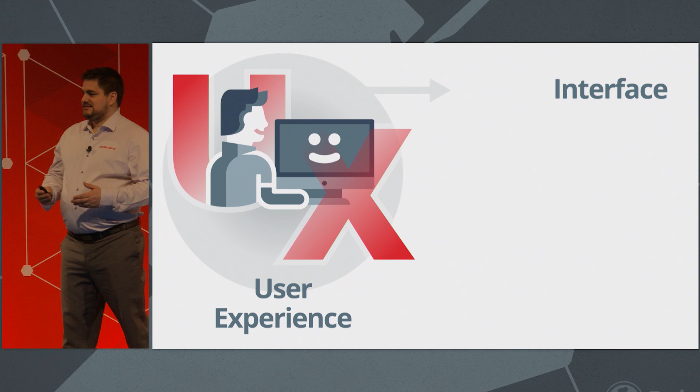This year, we targeted 3 main aspects to improve the user experience. First, we've worked on the user interface, the toolbars, the menus, the objects, the colors. This is how you interact with the software to get work done. Then, we've improved the ease of use of the software. We know we have the tools, we just need to make sure you can find them and use them properly.

Finally, to top this off, we've improved the performance of our software to save you precious time. Our end goal, whether you are a new user or an expert user, is to improve your productivity. Let's start with a quick preview of some of the changes we've done this year in terms of user experience.

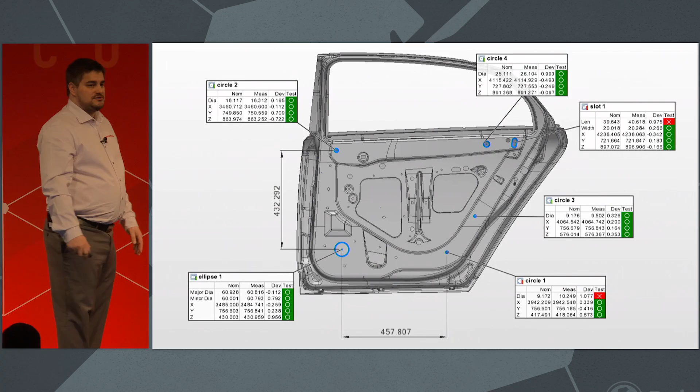This is the PolyWorks 2017 interface that you're already accustomed to. But now, let's take a look at the brand new and enhanced PolyWorks 2018. The first thing you'll probably notice is a completely revamped color scheme. We've also simplified the icons for clarity and to give PolyWorks a more modern look. The simple thought of new icons might intimidate some of you, but look at them. You can probably recognize all of them.

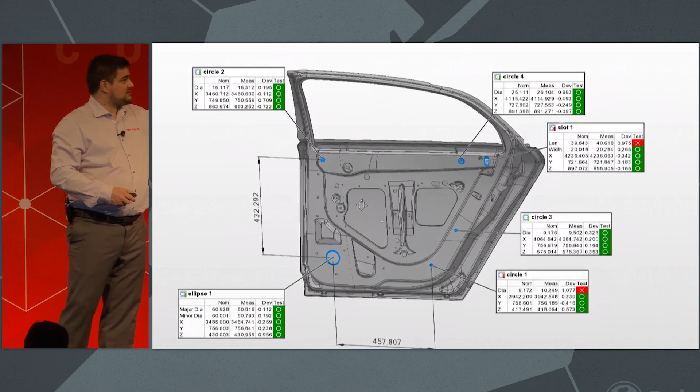Interactions within the 3D scenes have also been enhanced by offering you tools easily accessible when you need it. You'll be also happy to see that the annotations are now locked in 3D, meaning that you won't lose them when moving the model around. This was just a quick preview. Let's now explore in more detail how the user experience has been improved.

When you'll first install PolyWorks 2018, the first thing you will probably notice are the new icons for our main products. Here's the new icon for PolyWorks, PolyWorks Inspector, PolyWorks Modeler, and finally, PolyWorks Reviewer, which was formerly known as PolyWorks Viewer. Not only did we revamp the icons of our main products, we went all in and reviewed all the icons of the software.

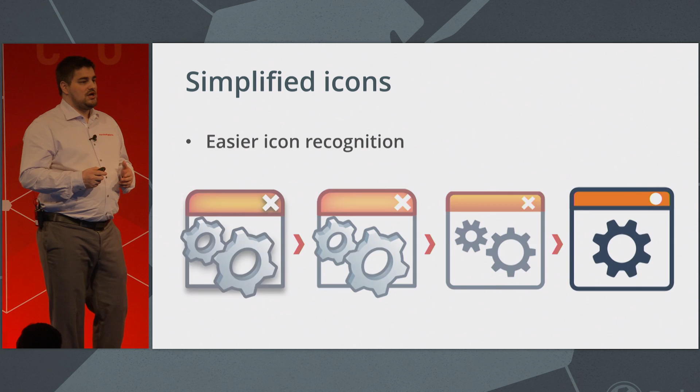The main objective behind this was to improve the icon recognition. We started by removing the gradient, the shadows, the 3D effect, and then we removed as much detail as possible to keep the icon simple. We wanted to improve the icon recognition, but at the same time, we wanted to ensure a smooth transition to the new version. So we kept the original concept behind each icon. Finally, we wanted to pave the way for future products. These more modern icons will fit better in various other environments.

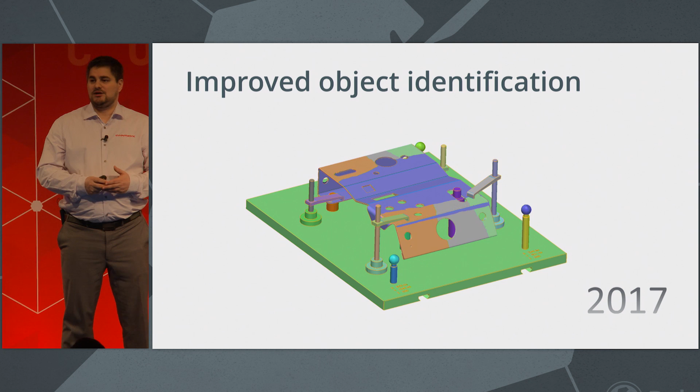For reference and data objects, we decided to use two distinct color palettes. For reference objects, we will use a gray palette, while we will keep a colored palette for data objects. This will allow you to know at a glance whether you're looking at CAD or data. You can also see that all the curves on the CAD models, whatever their types, now have the same color by default.

Similarly, measurement objects such as features and comparison points now have the same color by default. You can still change the color of any of those objects. We simply changed the default color.

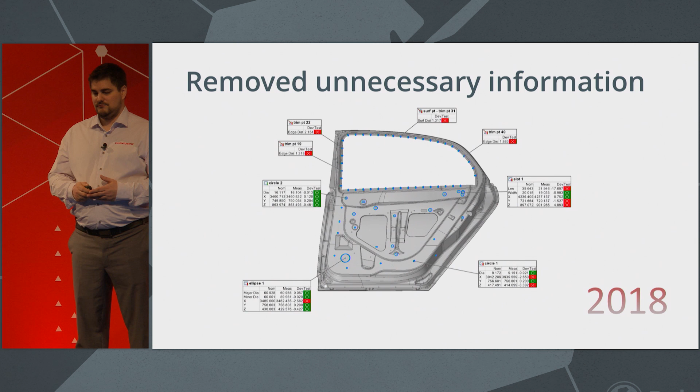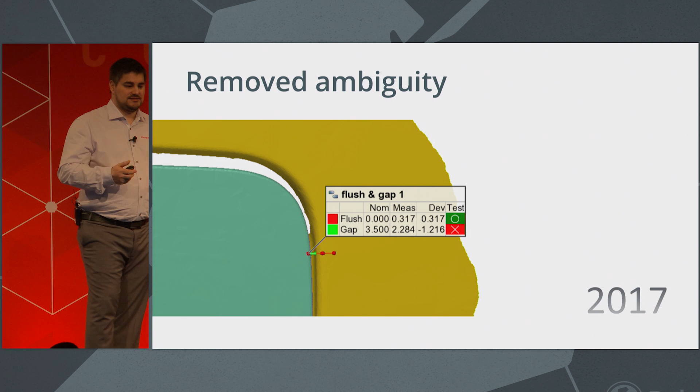In the past, we sometimes used bright red, green, and yellow for other purposes than to identify pass and fail status. For example, with the flush and gap gauge, the flush was always drawn in red and the gap in green, independently from their pass and fail status. And this could cause some confusion. So now, we're only using those colors to identify pass, fail, and warning statuses.

PolyWorks is a large, well-organized toolbox. But there are lots of tools and options, and we know that this can be overwhelming, especially for new users. So we're working hard on making these tools easy to use to speed up your learning curve and increase your productivity. To create snapshots or control views, you often need to move the annotations in the 3D scene.

And you want to also change the display options. To simplify this process, especially for new users, we wanted you to be able to find those tools and options on your own. We also wanted those tools to be only visible when you need it. To do so, we added a mini toolbar that pops above each annotation to allow you to do what you need with those annotations.

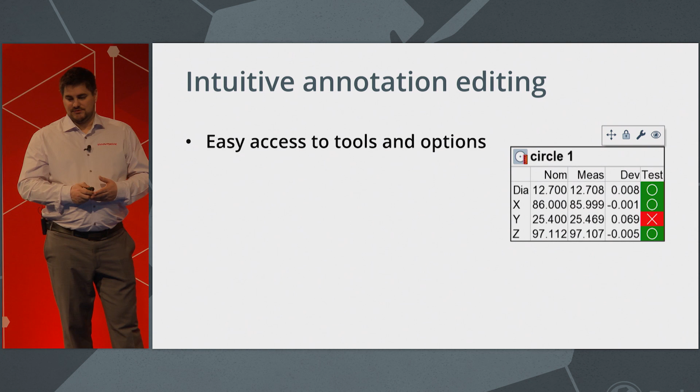Also, if you spend time manually positioning all those annotations, you probably don't want them to move from their new position. Therefore, we added a new mechanism that locks the position of those annotations in 3D so that they will move with the model. Let's take a look at a video that demonstrates those new functionalities.

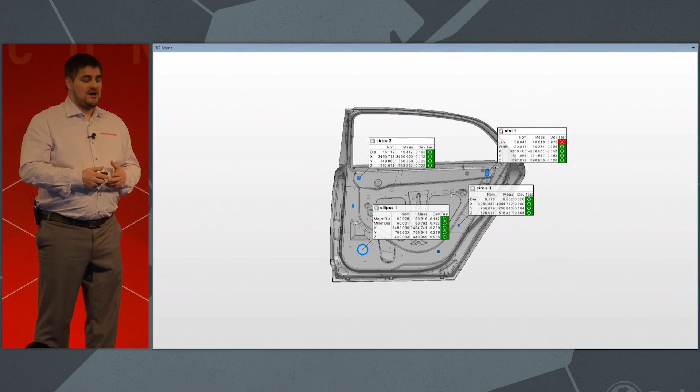In PolyWorks 2018, we're introducing new ways to interact with annotations. You can now simply put your mouse cursor above an annotation to access this mini toolbar. The move tool allows you to drag the position of the annotations. You will also notice that if you put your mouse cursor above an object, this will show the annotation if it was hidden.

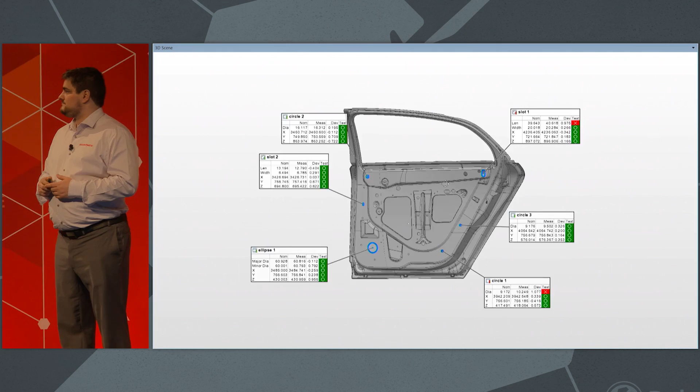As I mentioned, once we move those annotations, they're now locked in 3D, so you can move the model around and you won't lose all those positions. If you want to go back to the automatic positioning, you can unlock the annotation position. You can also easily edit the annotation content from this mini toolbar.

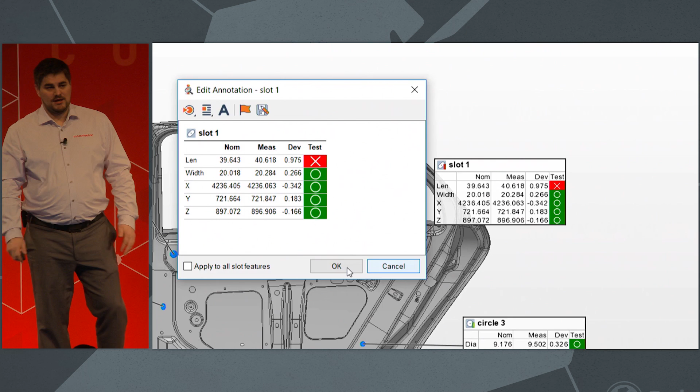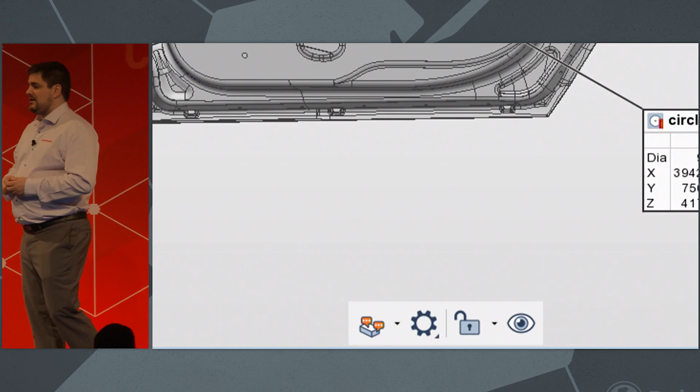Finally, you can easily hide an annotation and restore it. All these actions were only affecting a single annotation at a time. But now when you move annotations, you also have access to a global toolbar at the bottom of the 3D scene. This allows you to change the positioning mode or the display options of all those annotations, or lock, unlock, hide, and restore all the annotations at once.

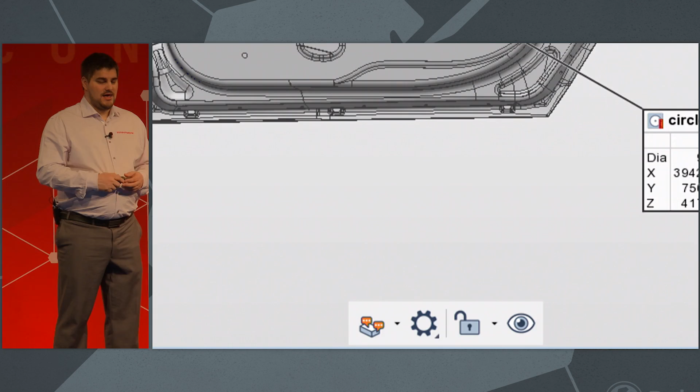Managing annotations is now easier than ever by having all these tools and options directly available in the 3D scene. Most of you know that PolyWorks has two main products: PolyWorks Inspector and PolyWorks Modeler. Some of you may only use one of these products, but certain data processing workflows need both PolyWorks Inspector and PolyWorks Modeler. They both have great tools that are complementary to each other.

Inspector is where you will scan, probe, and use different measurement tools such as features and color maps. On the other hand, Modeler specializes in the editing of polygonal models and the reverse engineering of 3D models. When you need to use both, you often need to transfer objects from one product to the other. To simplify this process, we now create a link between a Modeler and an Inspector project so that you can easily transfer objects with one click without the need for browsing.

Let's take a look at a typical reverse engineering workflow to show you how you can use this tool. A typical process starts in PolyWorks Inspector. This is where you will scan, probe, and maybe extract some features from the mesh. At one point, you're ready to transfer the scan data to PolyWorks Modeler. In PolyWorks 2018, this is easily done with a single click. This will create a new Modeler project, import the object, and link the two projects together.

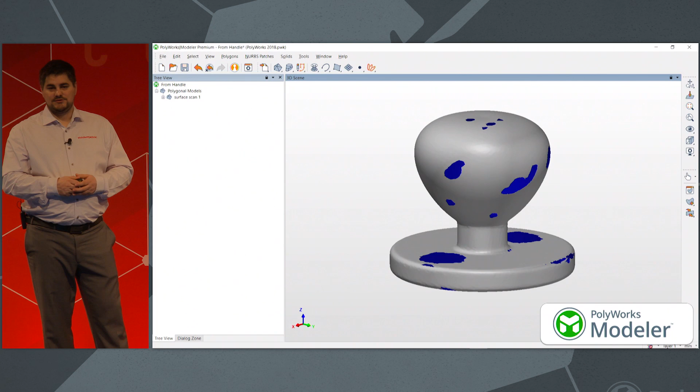Now in Modeler, you can continue the reverse engineering process. You can remove some features, fill the holes, create some curves, get NURBS patches, and eventually you'll get a NURBS model. In this example, we have the global shape of the object, but we're missing the two holes at the bottom.

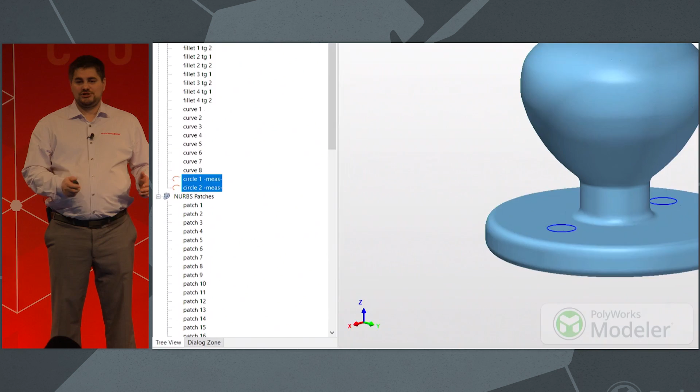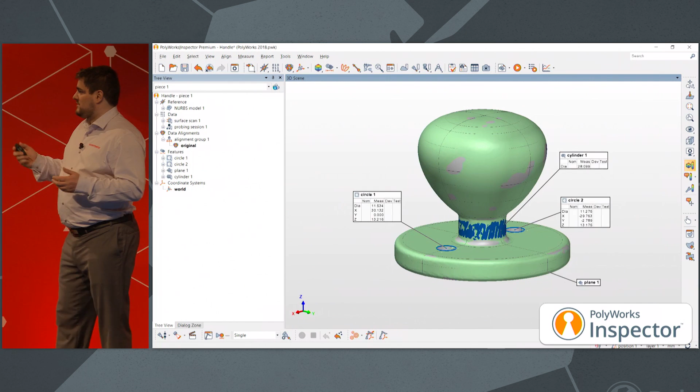To get those, we can go back to our Inspector project, select the two probe circles, and just transfer them to Modeler. Thanks to that link, we know in which project to send those circles. So now in Modeler, you can easily punch those two holes, and you'll have a complete 3D model. This process can go both ways. It can also go from Modeler, so you can take that NURBS model, bring it back to the original Inspector project to do, for example, a color map between the final 3D model and the raw, unedited scan data.

Performance. One of our ongoing objectives is to allow you to work as efficiently as possible. To do so, one approach is to identify key long operations and to shorten them by optimizing their algorithms. This year, our main focus was on improving the import of CAD models. When we import CAD models, we do a lot of processing.

For the IGES and STEP formats, this process was already multi-threaded, but for other CAD formats, a lot of the processing was still done using a single CPU. In PolyWorks 2018, we're now reusing the same technology as the IGES and STEP formats to fully benefit from all the available CPUs. This will cut down on the import time by a huge factor.

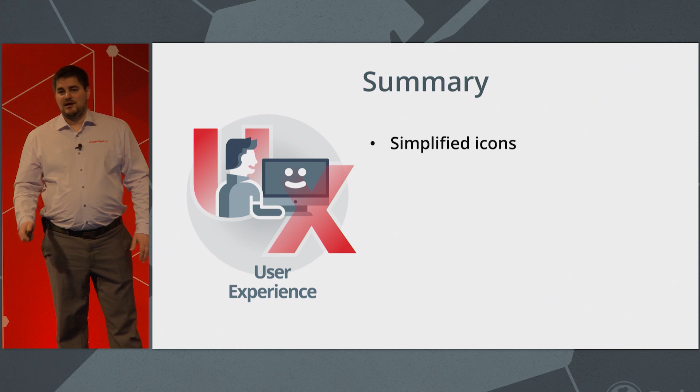Basically, the bigger the model, the greater the gain. To summarize, icons have been simplified to make them easier to identify. Colors have been adjusted for clarity and to remove ambiguity. Annotations are now easily managed directly from the 3D scene.

Transferring objects can now be done with a single click between products, and the import of CAD models is faster than before. All of these improvements will improve your day-to-day productivity when using PolyWorks.

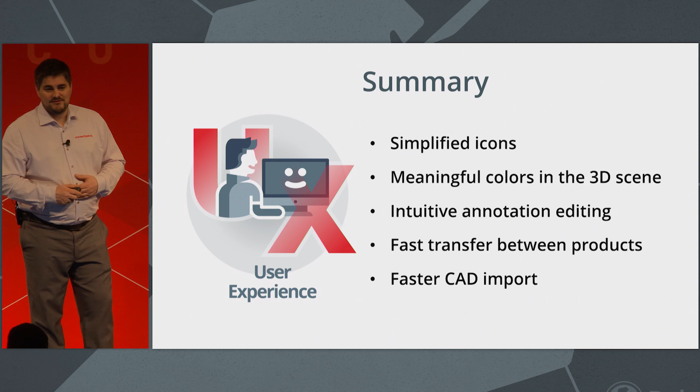This concludes my part. Thank you very much. I will now invite Éric back on stage to continue this presentation. Good job. Thanks, Richard.

So we've gone through the enhancements made to the user experience. Let's move now to the second part of today's presentation, universal projects. What is a universal project? It is a project that can be used on any of your devices. This ambitious development project started 6 years ago.

In 2012, we developed the multi-piece architecture. Projects could now contain multiple pieces in a single project. In the next 4 years, we developed the support of the CNC CMMs, a fundamental building block for the universality.

In 2016, we developed our conversion tools, so you can easily take an existing project and reuse it on a different device using those conversion tools. The same year we developed the offline simulation mode. Offline simulation mode is a key technology to create inspection projects.

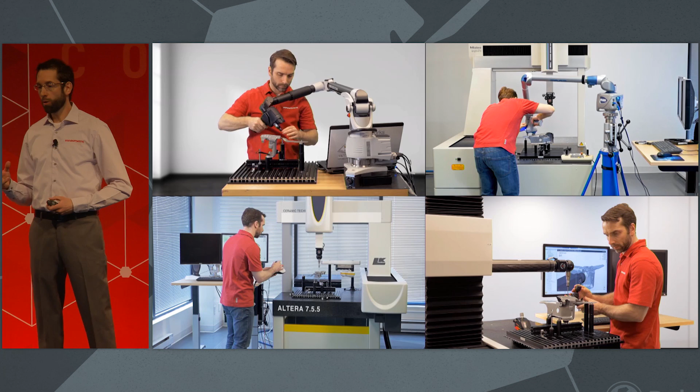Now, this year, we are introducing the new piece template technology, the final milestone in delivering you truly universal inspection projects. So with PolyWorks 2018 and the new piece template technology, you will be able to use your project on a variety of devices.

When measuring a new piece, the operator will be able to choose which piece template to use according to the available device. Switching from a CNC CMM to a portable arm has never been this easy. It's one click to choose the template.

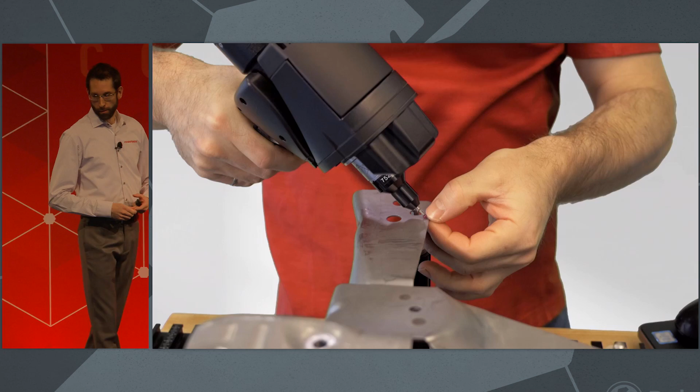There are many advantages of using different devices when measuring pieces. You will see in this demonstration that with the new piece template technology, it's not only a great advantage when changing devices, but it also offers the possibility to use different measurement plans, different measurement methods, different CAD models. So simply said, we are offering you shop floor ready universal projects.

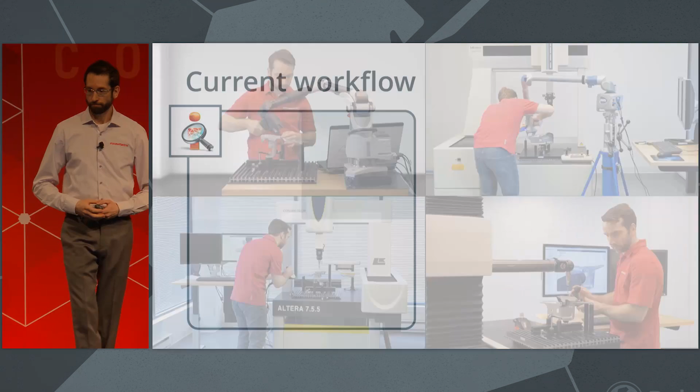So before discussing this new piece template, let's have a quick look at what you guys have today when you want to measure multiple pieces. Today, with PolyWorks 2017, you have to create a first piece that contains the necessary information: the CAD model with the nominal features, the device to be used.

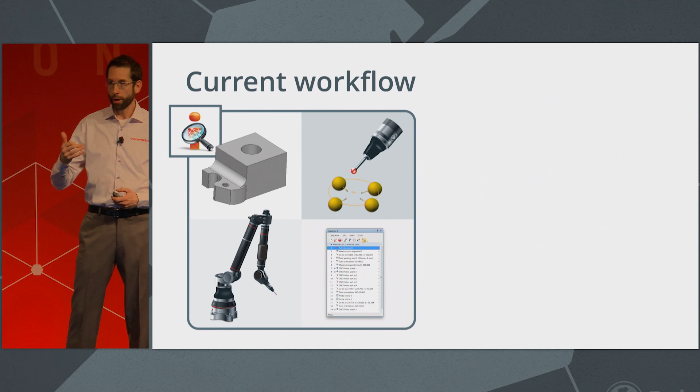The measurement methods must be defined inside the objects. The measurement sequence must be created. So this piece number 1 is the starting point for the multi-piece inspection workflow. When you measure a new piece, the previous piece is used as template. But what happens today if the targeted device is not available?

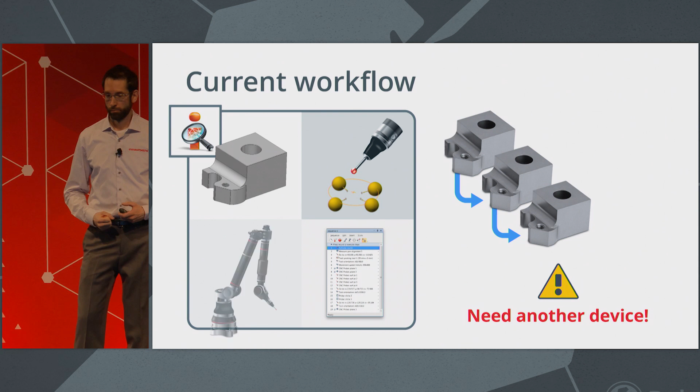If the arm is not available here, you have to create a new piece and perform some project modifications. The active device must be changed. The measurement methods must be adapted. The measurement sequence must be adapted as well. So my colleague Jean-Sébastien will go through these conversion steps later today in the workshop. Jean-Sébastien will show you how to convert your project.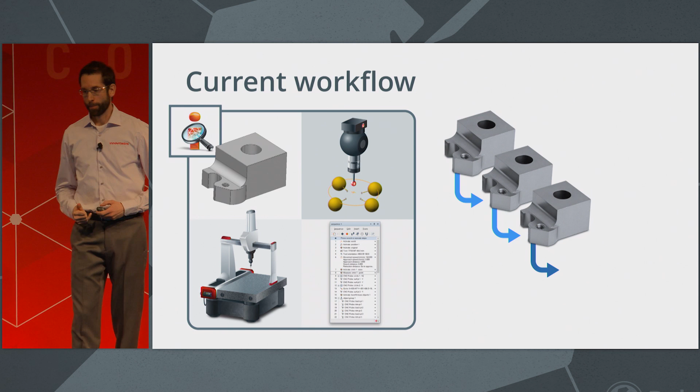But to minimize risk of operator errors on the shop floor, don't you think that these conversions should be planned ahead of time? Well, this is exactly what the piece template is all about. The piece template is a new and easy way to define within a single inspection project multiple piece templates. So each piece template will contain the necessary information for a particular workflow for a particular device.

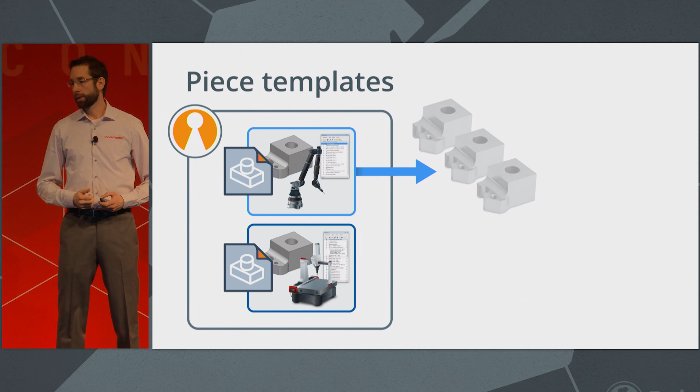And as you saw in the video, the operator on the shop floor can choose the piece template of his choice for his part measurements. A big benefit is that all these pieces are saved in a single inspection project, so you can use the multi-piece analysis tools such as SPC or Surface Data SPC.

So this project you see on screen is truly universal. Our goal has been reached. This project can be used on multiple devices. So let's have a look now at different use cases that will benefit from this new piece template technology. We've identified 5 interesting cases to demonstrate the flexibility of this new tool.

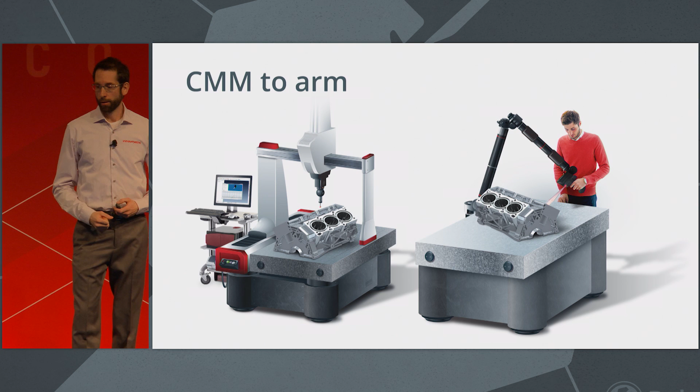That's use case number 1. Your metrology lab is equipped with a CNC CMM and a portable arm. The CNC CMM is quite in demand, so you want the flexibility to use the arm when needed. To do that with the piece template, it's easy. You create a first piece template for the CNC CMM, copy the piece template, convert the sequence with our conversion tools, and the universal project is ready.

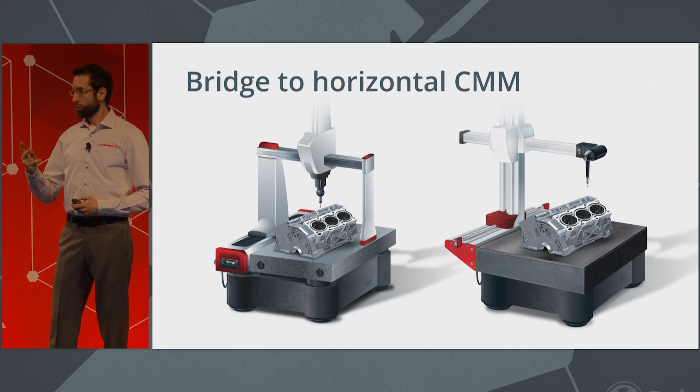Case number 2. Your metrology lab is equipped with 2 CNC CMMs. One is a horizontal arm and the other a bridge, so 2 types. Again, you can create 2 piece templates. What you have to do in this case is adapt the second sequence by matching the corresponding tools. The main difference between those 2 CMMs is the tools. The tool list is different.

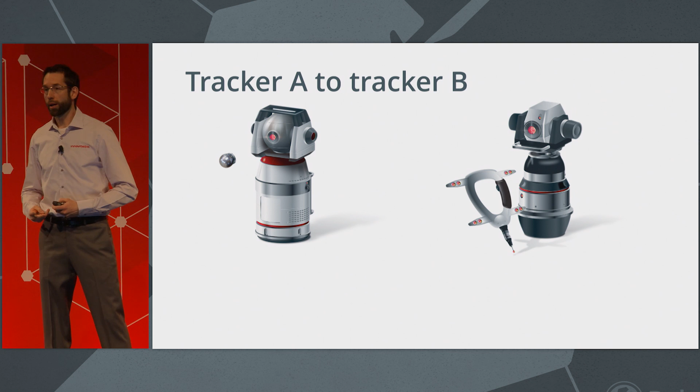In this example, you might not use CNC CMMs, but you have access to 2 different brands of laser trackers. Once again, you can create 2 piece templates. What you have to do in this case is simply adapt the reflector names and potentially probing modes inside the measurement objects. And you're ready to deliver a universal project on the shop floor.

So we've just seen 3 examples of using the new piece template technology that allow you to prepare your project for different devices. But the universality of projects goes beyond interchanging devices, and I'll demonstrate that with 2 other examples.

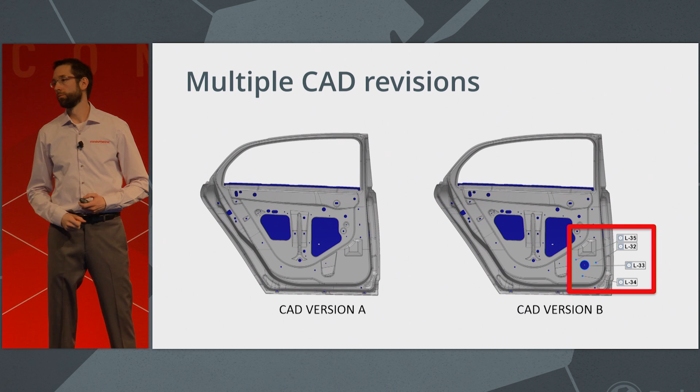In this example, let's say you are producing car doors, but you have 2 different models to produce. We can see on the screen CAD model version A and CAD model version B with additional holes on it. So once again, you can create 2 piece templates, one for each CAD model, and the operators on the shop floor are ready to use one or the other, depending on the part they have to inspect.

Here's a last example. You work for pre-production, you are measuring critical characteristics on those pre-production parts. But every 5 pieces or every 10 pieces, you need to perform a full inspection on all characteristics. Once again, the piece template is the solution. You can deliver a project on the shop floor that is ready for both scenarios.

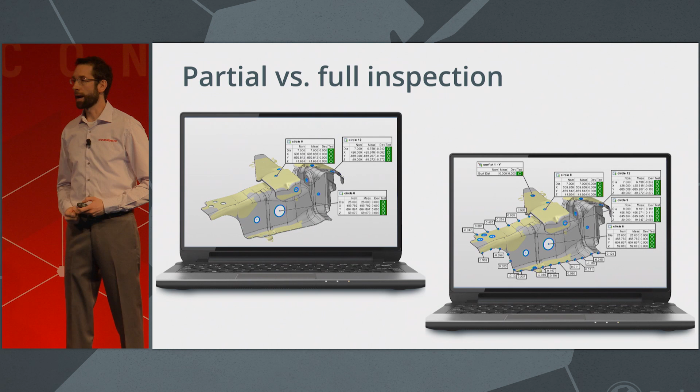So with PolyWorks 2018 and the new piece template technology, you will benefit from a very flexible work organization. All the operators on the shop floor will be ready to use any of the available devices. This will maximize the use of your measuring devices, and this will also reduce the risk of operators' errors, as no conversion or editing is required on the shop floor.

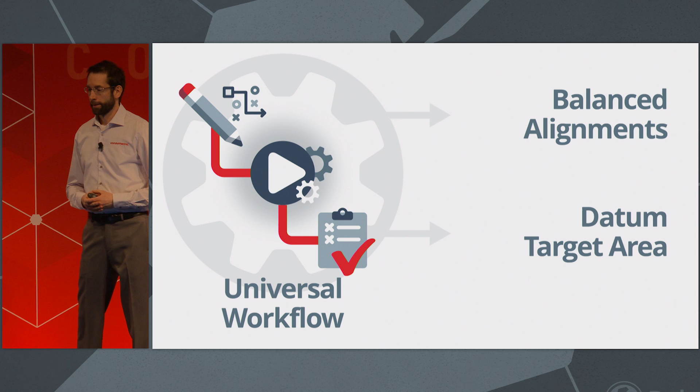So, as you guys know, using PolyWorks not only guarantees universal projects, it also gives you a universal workflow. You can create the core of your inspection projects always the same way, regardless of which device will be used in the end. One important aspect of this universal workflow is how you align your parts. You guys know that the alignment is critical. So this year, we've enhanced our alignment toolbox. I will first present enhancements made to our reference target alignment to better support balanced alignment. Then I'll show you an addition we made to our datum target toolbox.

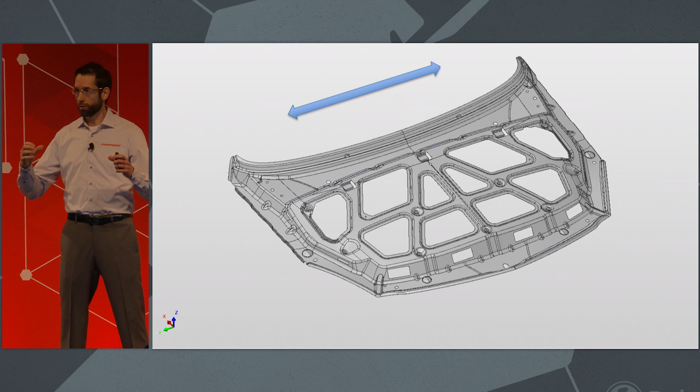Balanced alignments. One interesting case, probably the most important case for the automotive industry, is measuring symmetrical parts. When measuring symmetrical parts like this car hood inner, often the datum specifications require balancing the deviations on both sides. You want the deviations to be balanced on both sides of the part. So to do this kind of alignment today, you can create targets to lock the Z direction, 3 or 4 targets. We typically use holes to lock the X. And for the Y direction, you can define surface points or trimmed edge points on both sides.

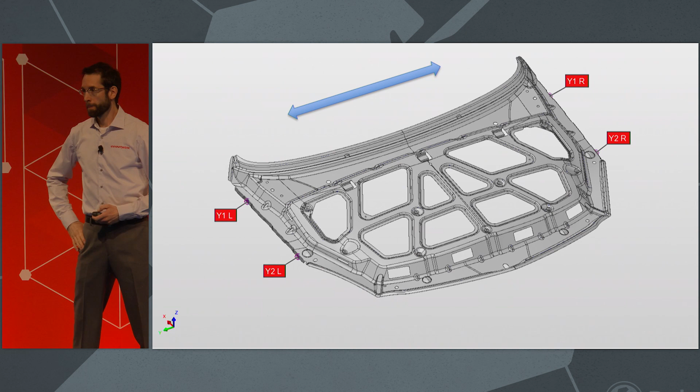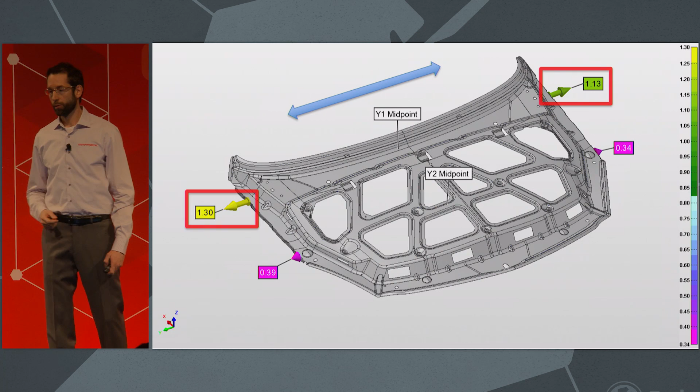Now to balance this alignment in the Y direction, you can do that today. Some of you have tried it, I'm sure. You can create midpoints and use those midpoints in the reference target alignment. If you have tried that today with PolyWorks 2017, you found out that the alignment is not balanced. You need to run a macro script to get a balanced alignment with PolyWorks 2017.

So, to be able to perform these balanced alignments without using any macro scripting, we've enhanced the reference target alignment. So you can now bind constructed features like midpoints to reference targets. And during the alignment, our new algorithm will iterate until the deviations on both sides are equal and well balanced.

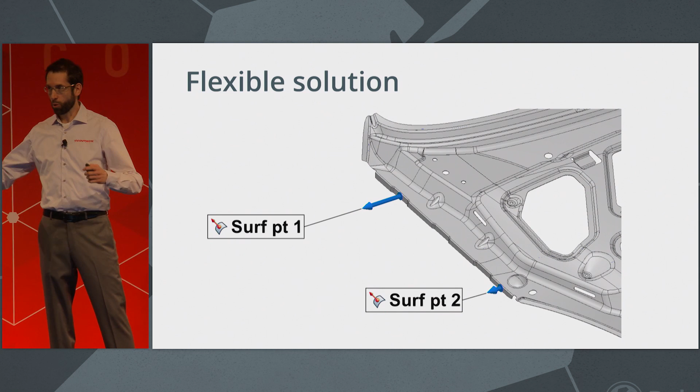So, this development offers you a lot of flexibility. You can create surface points on both sides, trimmed edge points, hemmed edge points. You could even use calipers to balance your alignment. As long as you can construct the midpoints, you are good to go.

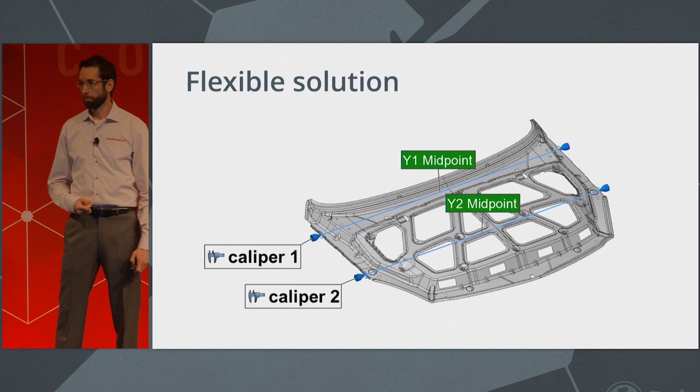This technology is also very useful when aligning blades. Are any of you guys aligning blades? I'm just curious. Any in the blade industries? Some? So this is critical for blade inspection.

Okay, there is one last item I'd like to present you today before I hand the mic to my colleague Martin. It is about datum target. As you know, datum targets are generally used to simulate the alignment of a part in a fixture, in a physical fixture. In some cases, if you are measuring rigid parts like castings, you could even eliminate the need of the physical fixture if you have access to the right tools on the software side.

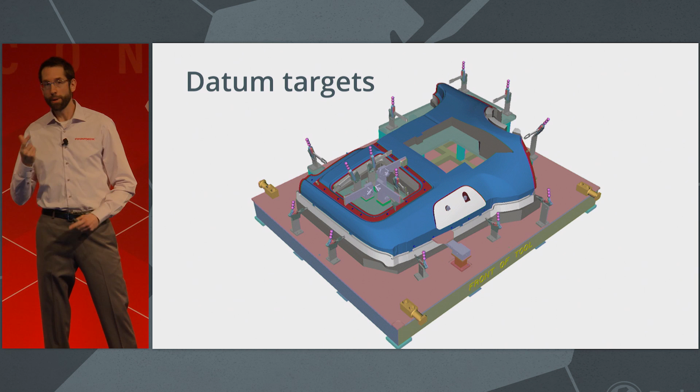With PolyWorks today, we already have a nice solution to create datum target points, datum target lines, but we are missing something important. We're missing the datum target area. So to precisely simulate the alignment of a part in a fixture, you need to be able to define the locating pad's position, shape, and size. And when you look at the inspection drawings, we typically see rectangular and circular datum target areas.

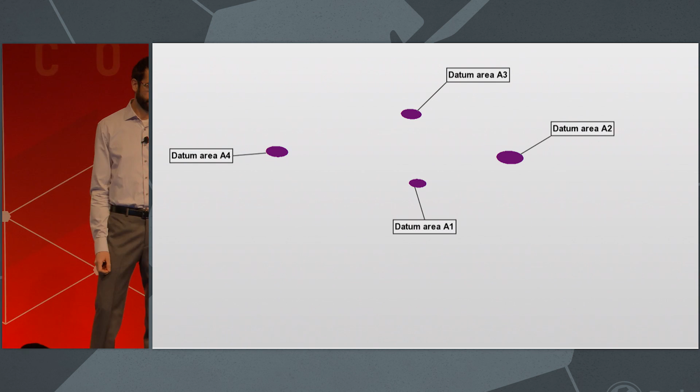So in upcoming intermediate releases of PolyWorks 2018, you'll be able to create datum target area, a circular shape or rectangular shape. Combined with datum features, you will be able to simulate fixture alignments.

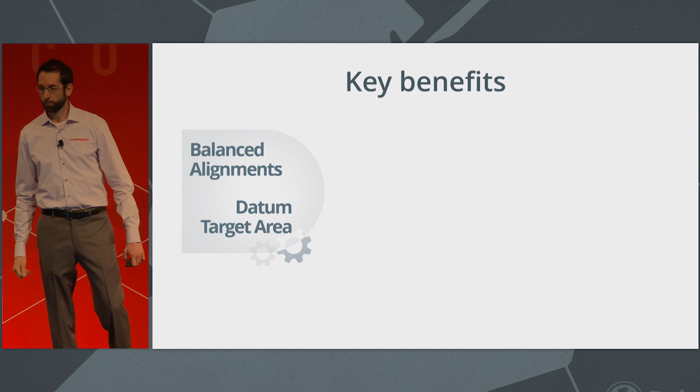So if we summarize the key benefits of these new alignment tools, you'll have the possibility now to balance alignment on symmetrical parts or blades using a well-integrated solution. And with the new datum target area that will be delivered in IR3, IR4, that's the plan, you'll be able to truly simulate the alignment of part in a fixture by defining the locating pad's position, shape, and size.

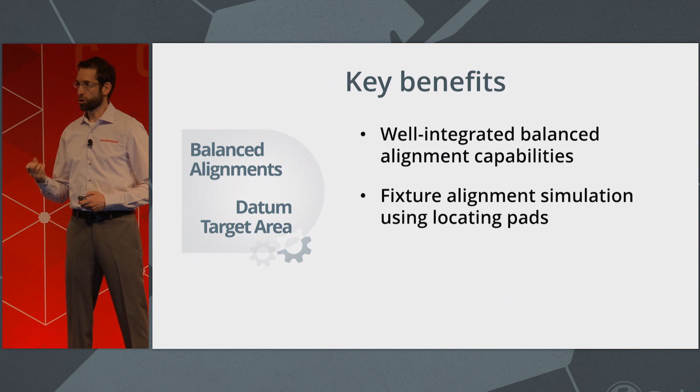So that concludes these two parts of today's presentation about universal projects and universal workflow. I will now invite my colleague Martin on stage to present the additions we made to our Universal Digitizing Hub. Martin?

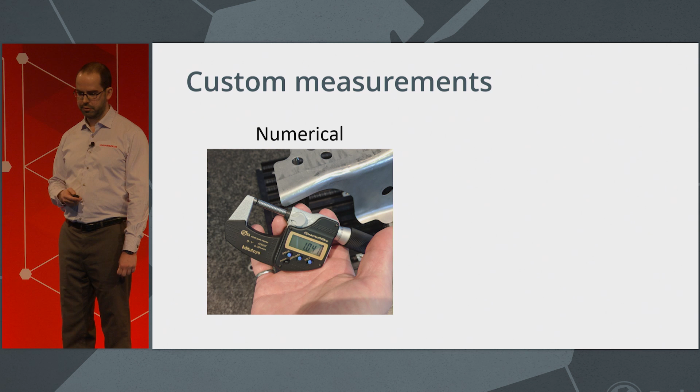Although PolyWorks supports practically all portable scanning and probing systems, there are applications where some specialized instruments are necessary to measure certain characteristics. In this new release, you can input results from any device or operator observations. For example, some of you may take numerical measurements using digital micrometers, calipers, or flush and gap gauges, to mention a few. Or you may want to report qualitative observations, for example, to validate the absence of defects, such as sink marks on plastic parts, or to validate the presence of certain features like pilot holes for sheet metal assembly.

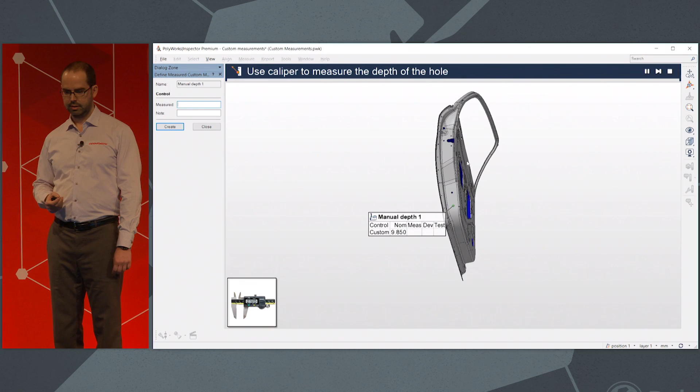Here's a PolyWorks Inspector project with custom measurements. A measurement sequence has been prepared for the operator who launches play inspection. When it's time for a custom measurement, a guiding text and image are shown. In this example, some measurements have to be taken using a digital caliper. The operator measures and types in the results in the dialog box.

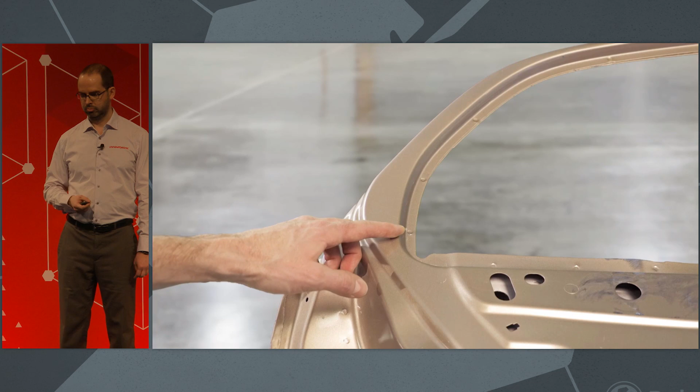Then he is asked to do a visual spot weld check. He goes through the spot welds following the 3D scene for guidance to the appropriate locations, then selects pass, fail, or warning for each one. The rest of the measurements are performed as usual. When inspection is complete, results can be reviewed in PolyWorks Reviewer.

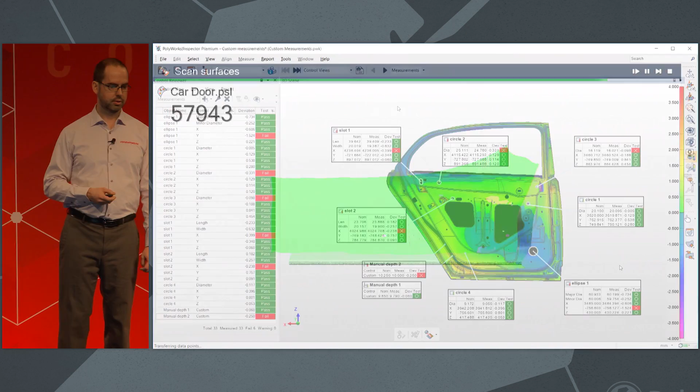Just like other measurement objects, custom measurements can be reviewed in 3D using 3D scene annotations. Custom measurements are also available in control views. In this example, there is a control view dedicated to spot weld checks.

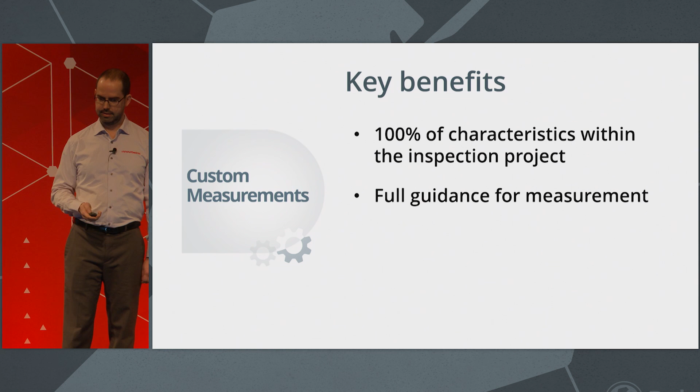Thanks to custom measurements, you now have 100% complete inspection projects. You no longer need a separate spreadsheet as every characteristic is included in your project and report. The operator has full guidance for measurement thanks to locations displayed in the 3D scene and to guiding images and text. Finally, you can review the results in 3D using 3D scene annotations and share with your team using PolyWorks Reviewer.

PolyWorks 2018 also introduces enhancements to the multi-CMM workflow. In PolyWorks 2017, our design for the support of multi-CMM setups was based on a workflow where you prepare a sequence in advance for each CMM. In those sequences, synchronization steps allow exchanging measurement data between the computers.

But in many cases, there's no advantage in preparing sequences in advance. This is especially true with manual CMMs, where operations are typically performed directly on the CMM without a sequence. But even with a CNC CMM, sometimes the inspection of a part is not going to be repeated, like when a part is being prototyped and is not yet in production.

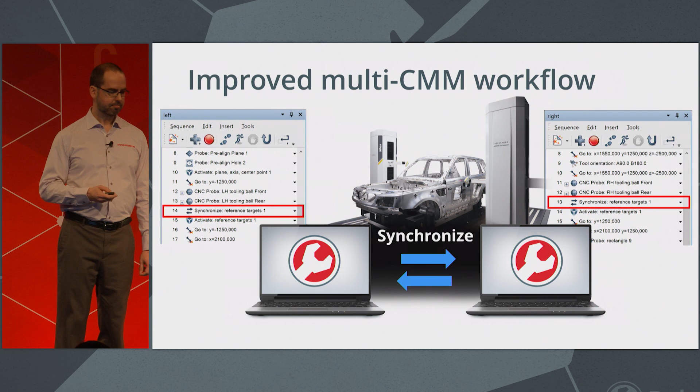To handle such cases, we now allow synchronizing on demand outside a sequence, while still offering the possibility to synchronize within sequences. In a common workflow, one operator drives the CMMs moving from one to another. He can measure on one machine, and thanks to the synchronize function, he can share measurement results with the other machines. This allows him to move from one to the other and to continue measuring.

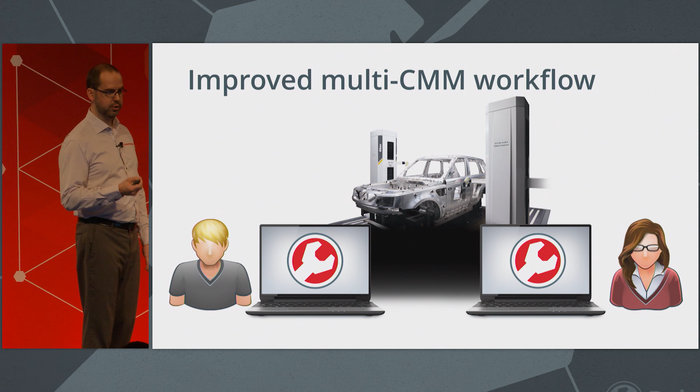The synchronize function also applies with multiple operators. After having measured alignment features, the synchronize function allows to compute the alignment, and then the measurements can be performed. In short, PolyWorks now allows you to efficiently measure with a multi-CMM setup, whether you use a sequence or not.

Now let's move on to CNC CMM metrology more specifically. Before we look at new functionalities, let me summarize the new hardware that's now supported. First, we keep putting a lot of effort into laser scanning. Why? Because with PolyWorks power and expertise in processing laser scan data, you can turn an old CMM into a high-precision scanning device and give it a new life.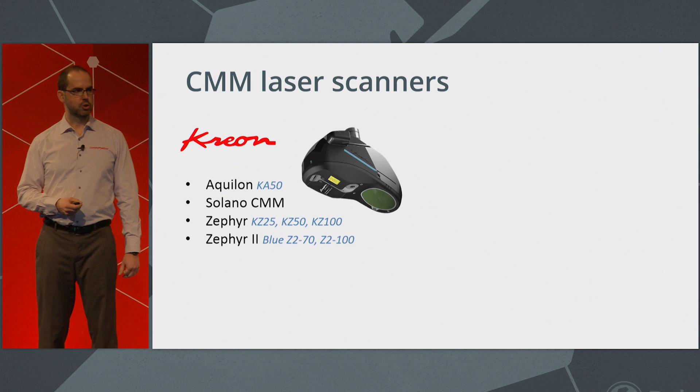To allow more and more customers to benefit from this, we now support the Zephyr 2 scanner from Kreon Technologies, and the rest of their CMM scanners will be supported in upcoming intermediate releases. And this is in addition to the complete range of Nikon CMM scanners that were already supported.

As for CMM controllers, we now connect directly to Mitutoyo CMMC controllers. This is in addition to already supported UC controllers. Even though CMMC controllers are older, they're still quite common. We also connect directly to SB Electronics CNC 06 controllers, which are typically used on Stiefelmayer CMMs.

And we offer the new Zeiss CMM plugin, CMMOS plugin, to connect to Zeiss CMMs with no need for a Zeiss I++ server license. This is in addition to already supported Hexagon, Nikon, Pantec, and Wenzel controllers.

When it comes to probe heads, PolyWorks now supports inferred calibration. In projects where a large number of tool orientations are used, inferred calibration saves time by not having to calibrate all tool orientations. When a head supports inferred calibration, a head calibration function can be invoked. And once the head is calibrated, calibrating a single tool orientation computes automatically the calibration for all orientations of this tool.

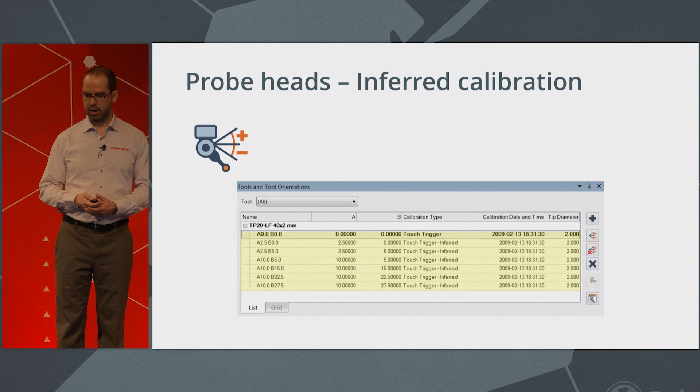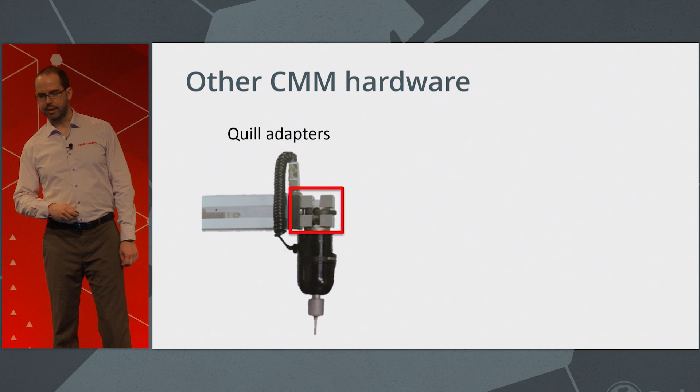We directly support the PH10 from Renishaw, which is a popular head in the automotive industry. And through the I++ CMM plugin, any head supporting inferred calibration can be used. As for other CMM hardware, we now support quill adapters, often called cubes. They are mainly used on horizontal machines to allow installing the head such that the probe or scanner is pointing down. And we support rotary tables on Nikon controllers. This sums up the additional hardware that's now supported.

Now let's move on to new functionalities for CNC CMM metrology. It's sometimes a challenge to create a robust measurement sequence on a CNC CMM. For instance, when a part is being prototyped, features on the prototype part are not always located as specified by the CAD model. PolyWorks offers 3 new tools to help you build robust sequences to measure deviated parts.

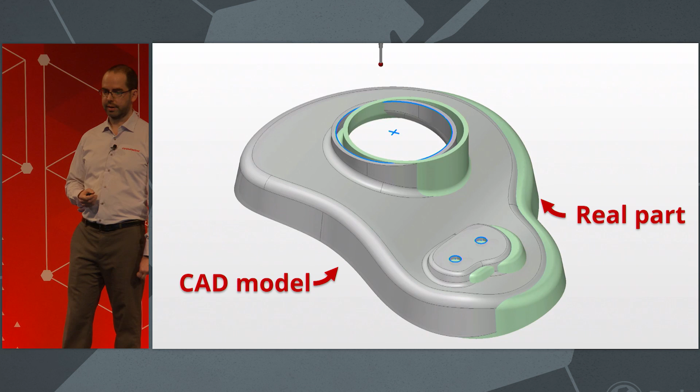In this project, the CAD model is displayed in gray and the actual part in green. You'll notice that the actual shape doesn't exactly match the CAD model. This is typical on sheet metal parts. This hole has a very thin surface on which a local plane has to be probed. Since the hole is deviated, probing would fail if the deviation was not taken into account.

The new locate hole center functionality takes 3 points to estimate the location of the hole, and then from this estimate, the measurement location is adjusted to properly measure the hole, the local plane, and the hole itself.

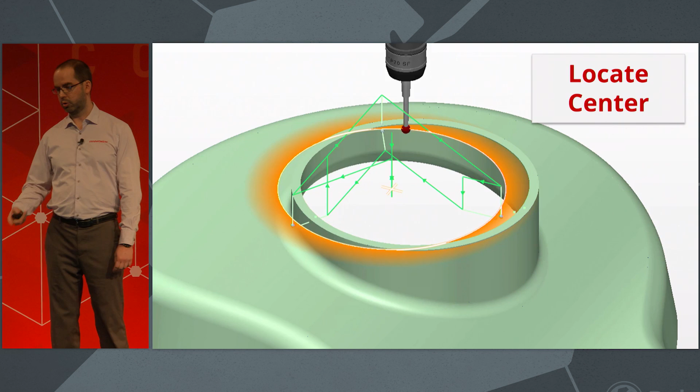There are also small holes for which CNC probing could easily fail if they're deviated. With the new hole search functionality, if the hole is not at its nominal location, a spiral search will be triggered to find it automatically. And when the hole is found, its location can be determined more precisely using the locate hole center functionality that we've just seen. Then measurement is performed.

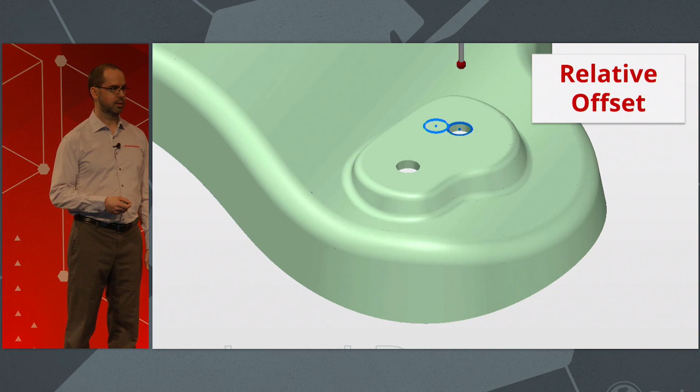You can also use a deviation of one hole to adjust the measurement location of other holes. The relative offset tool is an efficient way to measure multiple deviated features. In this example, the deviation of the first hole is used to adjust the measurement location of the second small hole. This tool is flexible as it supports relativity to any number of objects.

With locate hole center, search hole, and relative offset, you have all the tools you need to build robust measurement sequences for CNC measurement of deformed parts. In PolyWorks 2018, we've also enhanced our collision analysis tools. An important addition is offline collision detection.

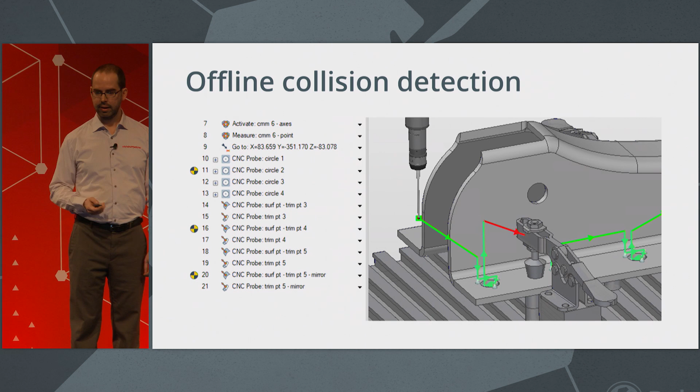When preparing a measurement sequence with collision detection activated, PolyWorks warns you if there's a risk of collision by way of icons in the measurement sequence and red lines in the 3D display of measurement paths. This is done in real time as the sequence is edited. And often sequences are also built by recording operations directly on the CMM.

And to prevent collisions in this case, detection is also available while the operator is interacting with the CMM. This is something that traditional CMM software generally doesn't support. If an operation creates a risk of collision with the part, with the fixtures or CMM table, a warning message is displayed to the operator before the operation is performed on the machine. Supported operations are change tool orientation, go to position, as well as CNC probe and CNC scan.

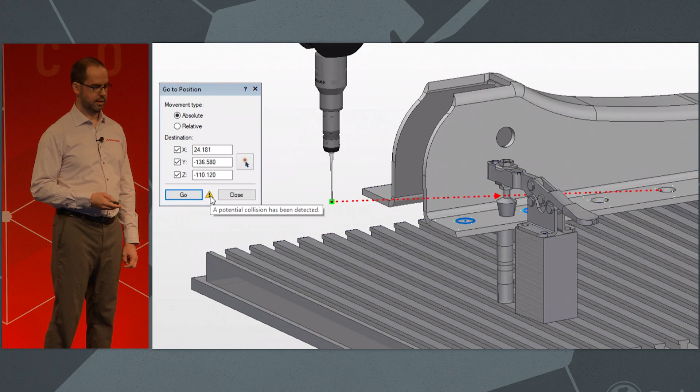But that's not all. We not only detect collisions, we also help you avoid them thanks to the automatic generation of collision-free movements. Suppose your project contains two features for which the CMM cannot directly move from one to the other. On the collision icon, a fixer allows you to insert automatically computed go-to steps to avoid the collision. PolyWorks computes intermediate points to define the shortest path that does not collide with the CAD.

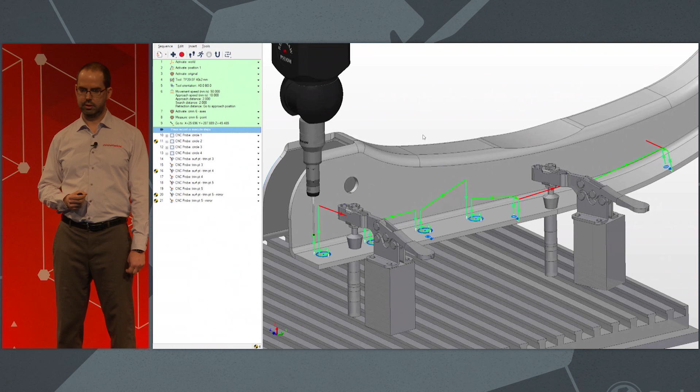Most of the time, one go-to is sufficient, but PolyWorks also handles more complex cases and can also fix multiple collisions at once. This will be covered in more detail by my colleague Roberto in a workshop tomorrow.

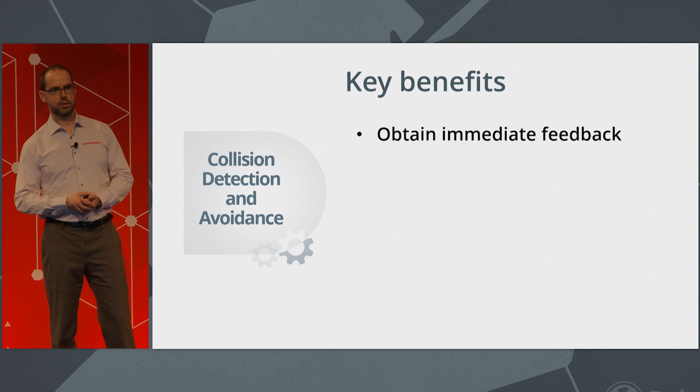Here are the key benefits of collision detection and avoidance tools. You get immediate feedback as a measurement sequence is edited or while performing operations directly on the CMM thanks to real-time analysis. Using automatic go-to position makes it quick and easy to create collision-free measurement paths. And finally, you can rely on the collision analysis tools no matter whether you're working online or offline to minimize the risk of collision. With those new tools, PolyWorks is moving one step further towards the automatic generation of smart CMM measurement paths.

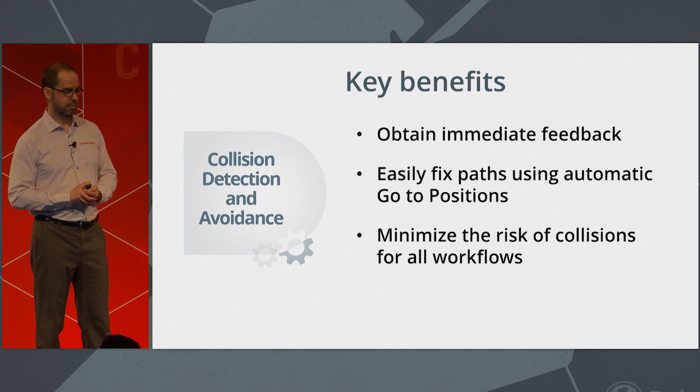So this concludes our presentation on what the new PolyWorks 2018 release has to offer. Briefly, what are the key benefits of this new PolyWorks 2018 version?

Give me a sec. Okay, we're back.

So the first benefit of this new release is about piece templates, with the possibility to create not only one, but multiple piece templates inside a single inspection project. You guys are ready to deploy truly universal inspection projects on the shop floor that are playable anywhere on any of your measuring devices. The second benefit is related to CNC CMMs.

With the additions that Martin presented, the additions we made to be able to search holes, to locate hole center, the relative objects, and the great enhancements made to our duplex CMM solution, we are now ready for your sheet metal inspection on CNC CMMs. We have all the major functionalities. And finally, Richard presented enhancements we made to our interfaces to offer you a better user experience. Well, better user experience means enhanced productivity for you guys.